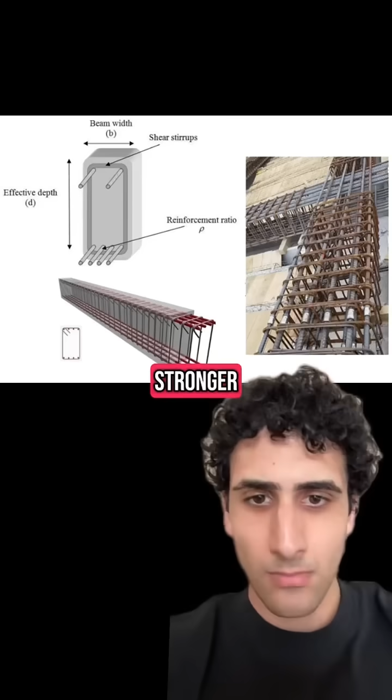Did you know that you can't actually just keep adding more and more steel rebar to your concrete structures to make them stronger? To understand why an over-reinforced concrete beam would still fail, we need to look at how beams would act under loads and how that would interact with the concrete and the rebar.

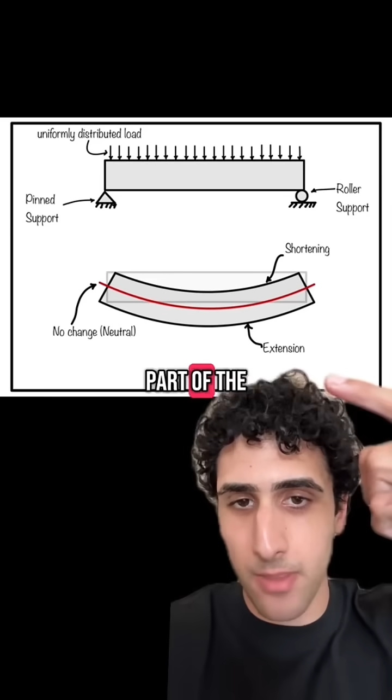In this diagram above, we can see the deformed shape of a beam under a simple load, and we can see that the top part of the beam is shortening and the bottom part of the beam is extending. So that means the top part of the beam is forming compressive stresses and the bottom part is forming tensile stresses. This is important to know because concrete is strong in compression, but extremely weak in tension. So to counteract this, engineers will place the steel rebar where the tensile stresses are expected to form.

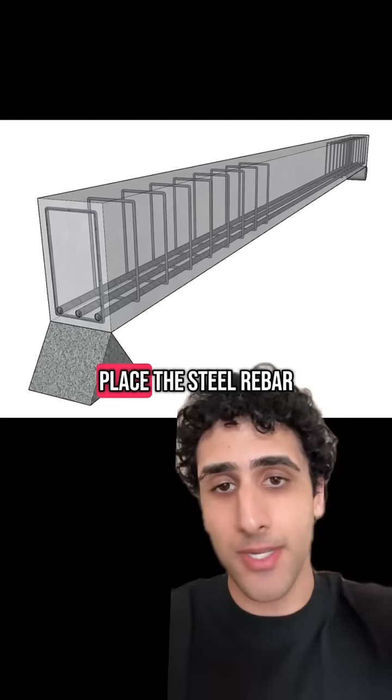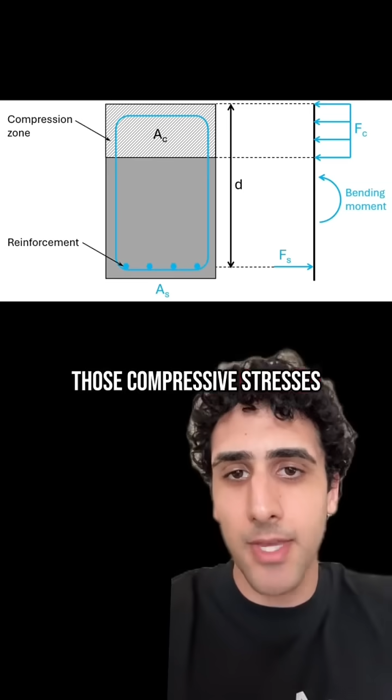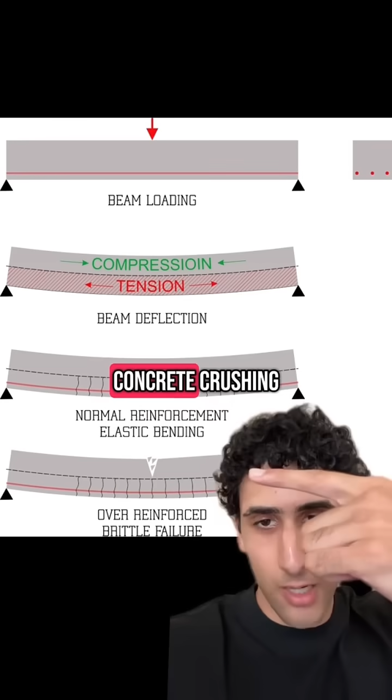Now, in designing these members, we actually section off a compression zone, which is going to be the area of concrete that fully resists those compressive stresses, and then the steel rebar is going to fully resist the tensile stresses. This means that if we were to keep adding steel rebar, all we'd be doing is changing the failure mode from the steel yielding here to now the concrete crushing, which would lead to a very brittle failure, meaning there'd be almost no warning that the concrete member is about to fail since concrete fails so suddenly.

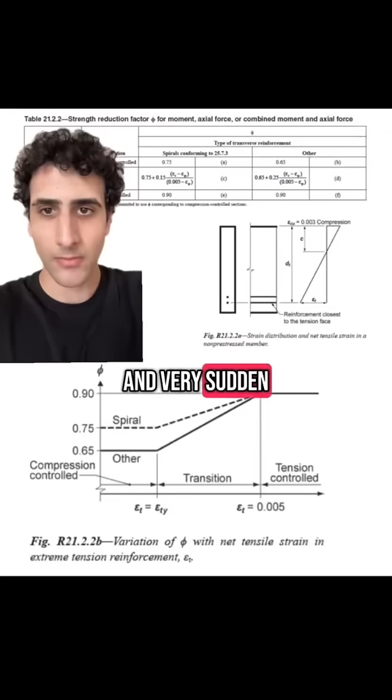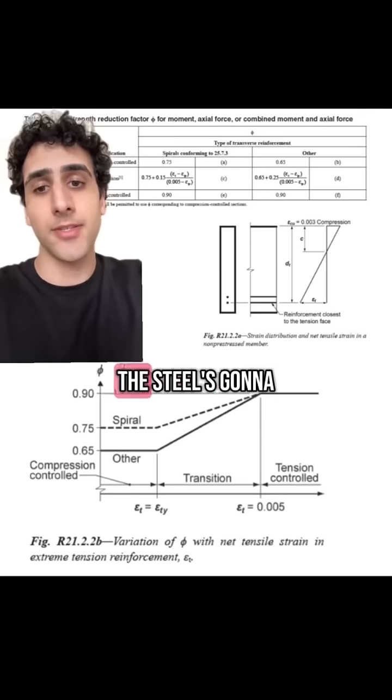The concrete building code recognizes the difference in these two different failure modes by requiring us to apply a high strength reduction factor to our compression controlled section. As you can see in the graph below, if it's determined through analysis that the steel is going to strain a small amount, that'll put us in the compression controlled region, which means we have to apply a strength reduction factor of 0.65. And that basically means we can only take 65% of our member's nominal capacity.

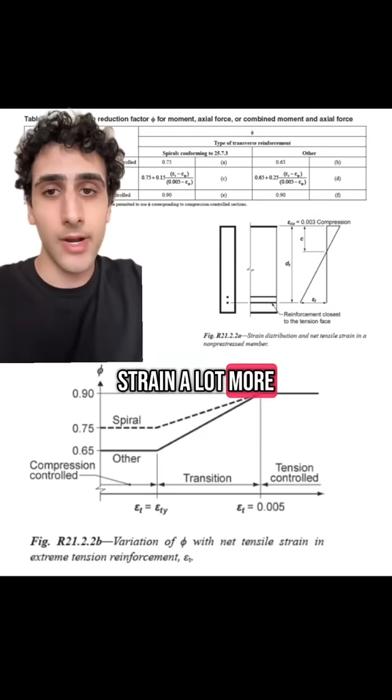Whereas if it's determined that the steel is going to strain a lot more and give us a ductile failure mode, or what we call tension controlled, then we're allowed to use a strength reduction factor of only 0.9, which means we can take 90% of the member's nominal capacity. In concrete design, we also have maximum reinforcement limits to help remind us of this, but at least now you know the physics behind it.